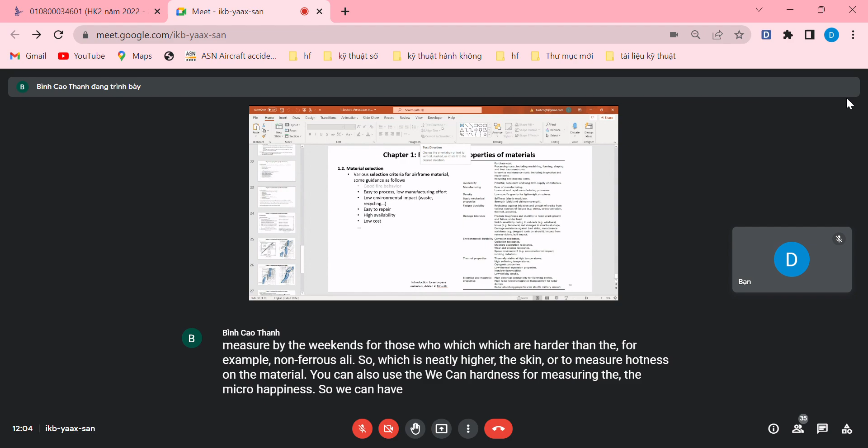Vickers hardness is quite great because it has a continuous scale, which can measure from soft material up to very hard materials. But it takes a little bit longer time to measure compared to Rockwell hardness, for example Rockwell C.

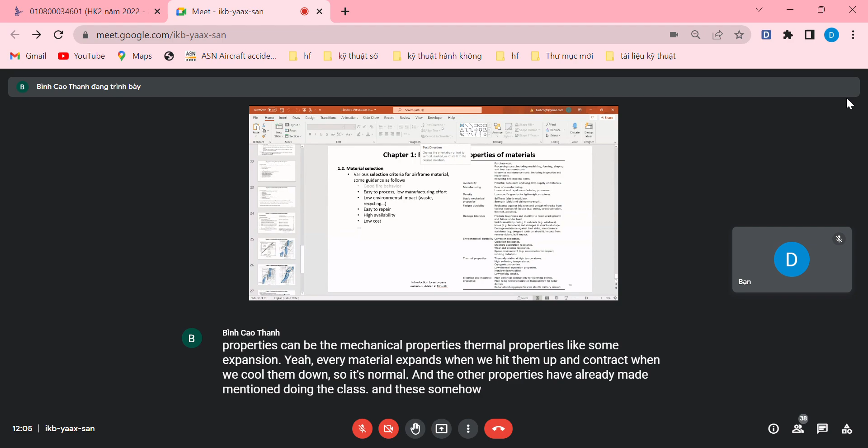We also deal with different kinds of properties - can be mechanical properties, thermal properties like thermal expansion. Every material expands when we heat it up, and contracts when we cool it down. So it's normal. The other properties have already been mentioned during the class, and are somehow related to the cost of strength of material - for example, the strength.

For example, the stiffness. You have the relationship between stress and strain, and we have the stress-strain curve for every material. Let's say the elongation, percentage elongation, in order to show whether the material behaves ductile, in a ductile regime, or in a brittle regime.

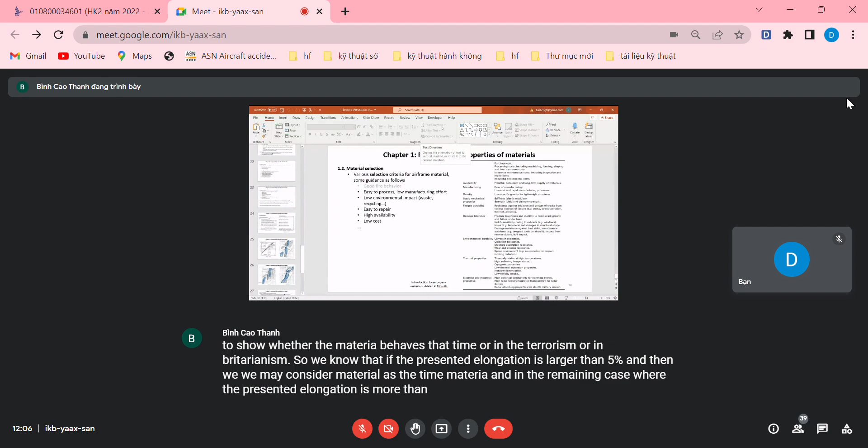We know that if the percentage elongation is larger than 5%, we may consider the material as a ductile material. In the remaining case, where the percentage elongation is smaller than 5%, you have brittle materials. For ductile material, generally speaking, you have damage tolerance, because if there is an impact force applied onto the component made of ductile material...

In that case, if the stress occurring inside the material is larger than the yield strength, you can have plastic deformations. Then the stress continues to increase up to the ultimate tensile strength, and afterward you may have fracture.

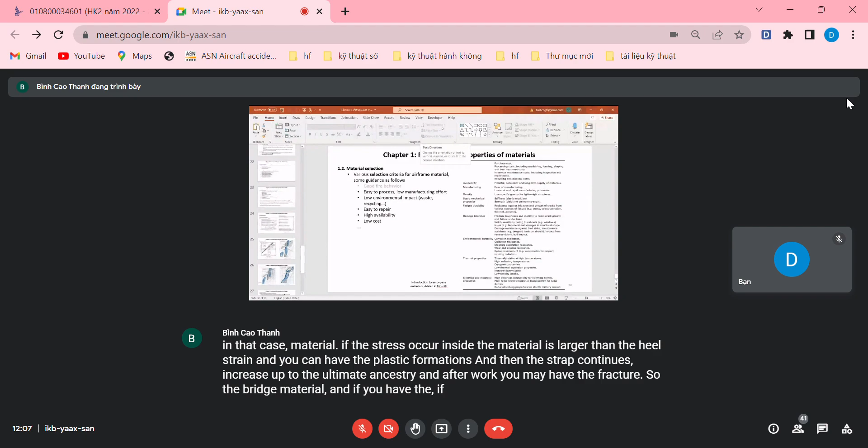But for the brittle material, if the external load applied onto the component is larger than the yield strength, you may observe sudden damage, and there's no damage tolerance. So this is unexpected for aerospace structures, where you need damage tolerance.

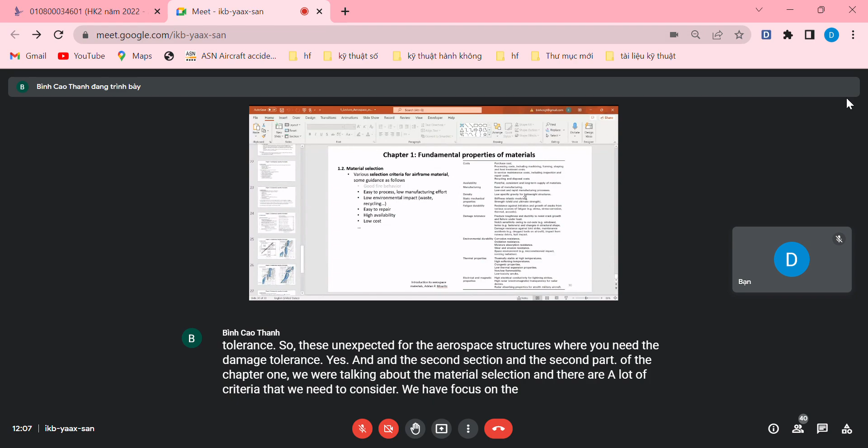In the second section, the second part of chapter 1, we were talking about material selection, and there are a lot of criteria that we need to consider. We have focused on the graph generated by Professor Michael Ashby, as I have talked to you about.

Here on this slide, you can see that there are several criteria that you can consider when you select the material for an aerospace application.

One of the most important things you should consider initially is cost, because if it's too expensive, it's meaningless to consider in the next step.

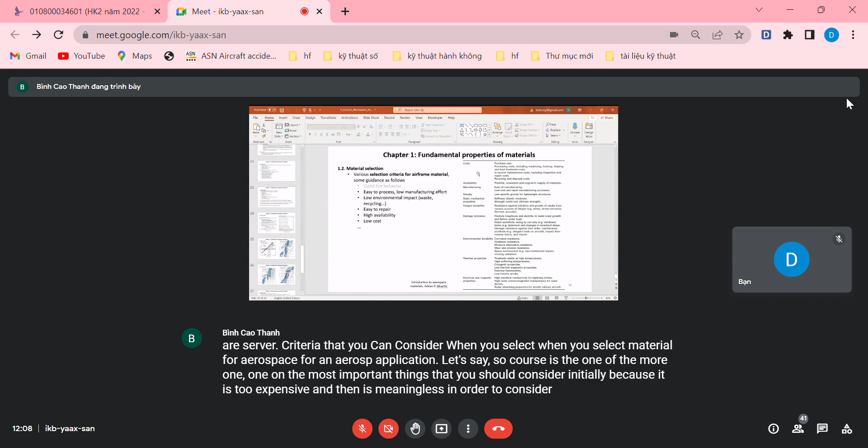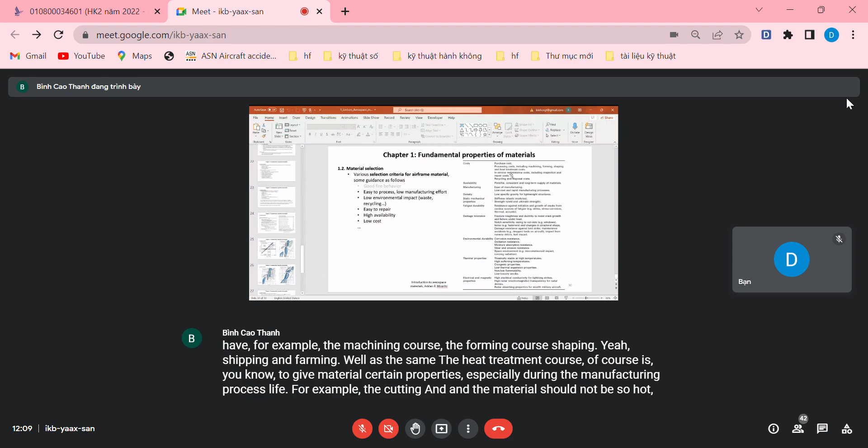This can contain the purchase cost, processing cost, regarding the manufacturing phase. The related costs can include machining cost, forming cost, shaping and forming. The heat treatment cost is to give the material certain properties during manufacturing, like cutting - the material should not be too hard, otherwise the cutting tool will wear fast, and you need to replace it with a new cutting tool or reshape the cutting edge of the tool before continuing the cutting process.

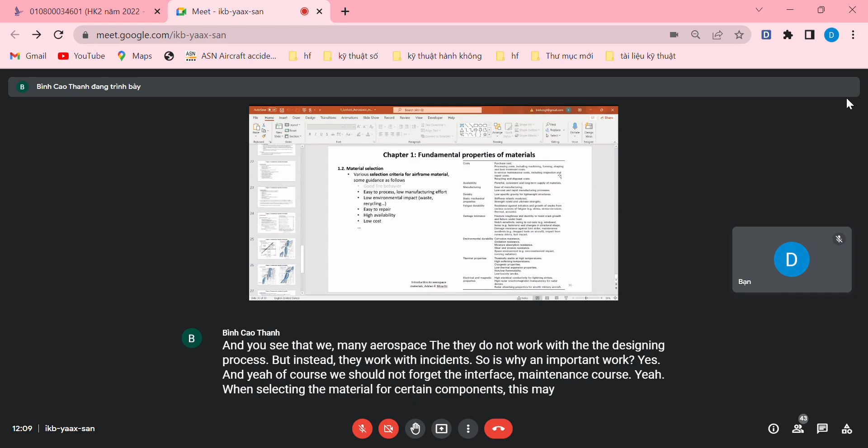In-service maintenance costs: you work with aerospace components, and many aerospace engineers do not work with the designing process, but instead work with in-service maintenance. It's quite an important work. We should not forget the in-service maintenance cost - when selecting material for certain components, this may include inspection cost and reparation cost. Also recycling and disposal costs, if needed.

Availability, yes, because if this is plentiful cost may be reduced, but if it is too hard to find a suitable material for making a certain component, the price rises significantly due to the material being unique and quite difficult to find.

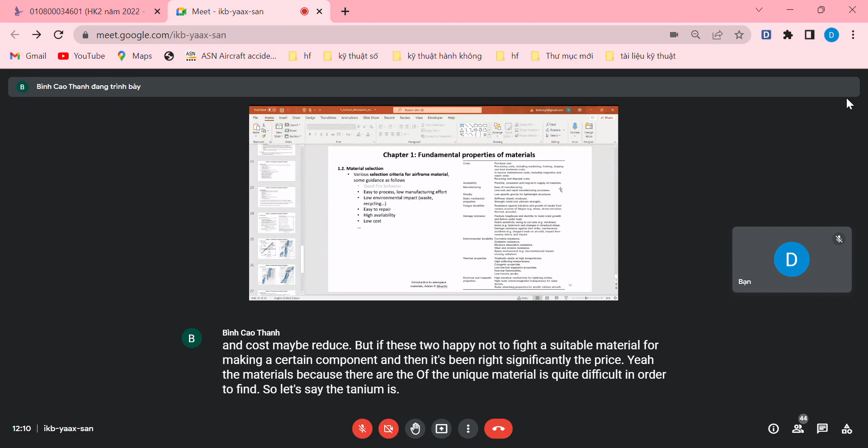So let's say titanium is one of the expensive materials. Nickel is also expensive. For example, for wire, we use copper alloy instead of gold - we know gold has the highest electrical conductivity, but due to the high cost, we don't use it for general electrical components in airplanes. But for other applications in the computer field, it's possible to use.

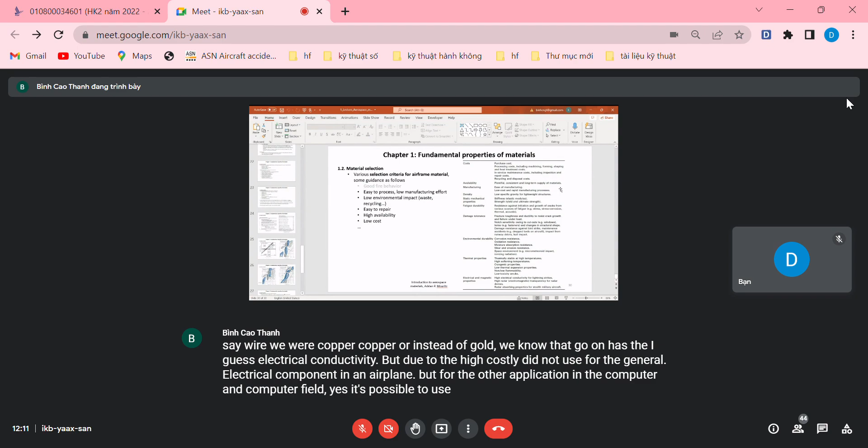Manufacturing - it should be easy for manufacturing. Otherwise it will take a long time to fabricate the parts, and then we have to apply heat treatment, for example, to promote the ease of manufacturing for the materials, in order to reduce the cost of the manufacturing process. That's why we need to reduce the cost - we need to make the manufacturing process faster, or rapid manufacturing process.

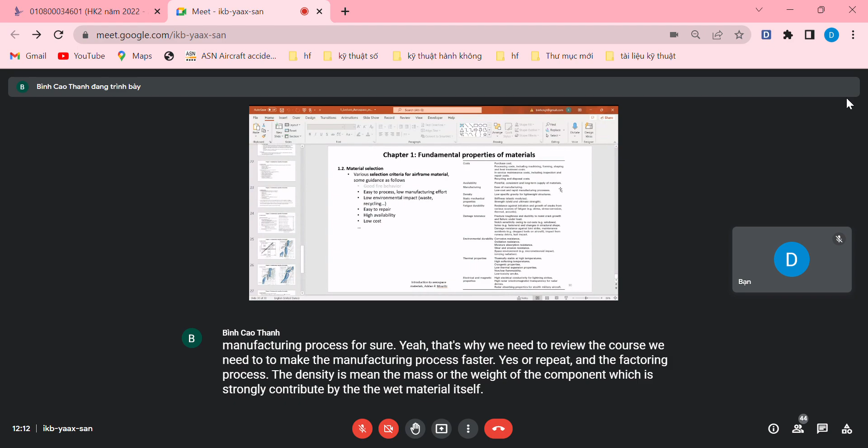Density means the mass or weight of the component, which is strongly contributed by the weight of the material itself. Even if you optimize the shape of the structure, if you use a heavy material, the part will be heavy as a result. For the same components, if you use steel, it will be more or less 3 times heavier than if you use a part made of aluminum alloy. This is one of the criteria you need to consider when selecting the suitable material.

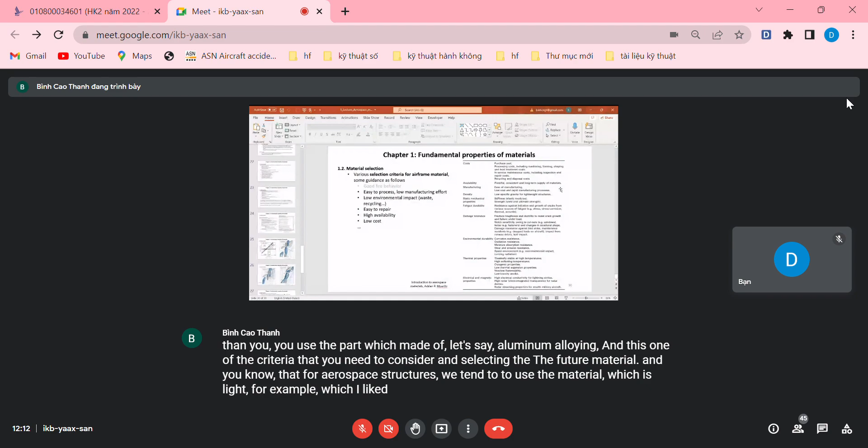For aerospace structures, we tend to use light materials, for example aluminum alloy, titanium alloy, or nickel-based super alloy instead of steel. But anyway, steel is the traditional material for heavy loaded structures. So in aerospace, people still use steel - for example, the landing gear can employ steel as the use material.

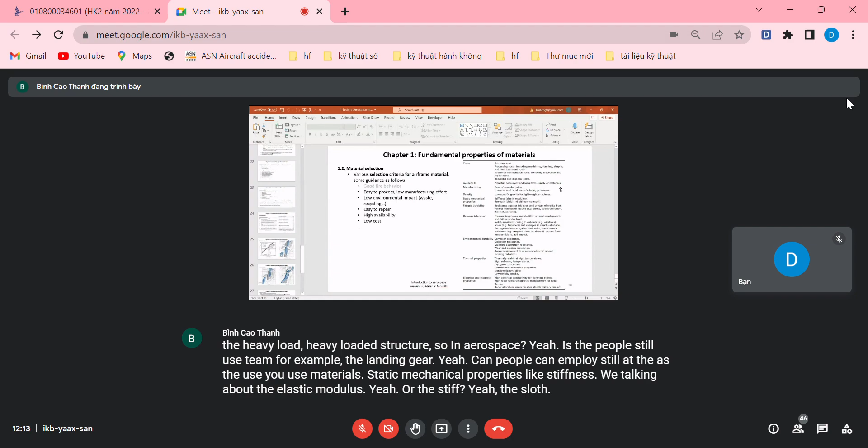Static mechanical properties like stiffness - we're talking about the elastic modulus, or the slope of the stress-strain curve within the elastic region, which means the stiffness. Or the strength - we are talking about the yield strength or the ultimate tensile strength. But normally we refer to the yield strength because we want the component to work within the elastic regime rather than the plastic regime, because when plastic deformation occurs, this is permanent deformation, without elastic recovery.

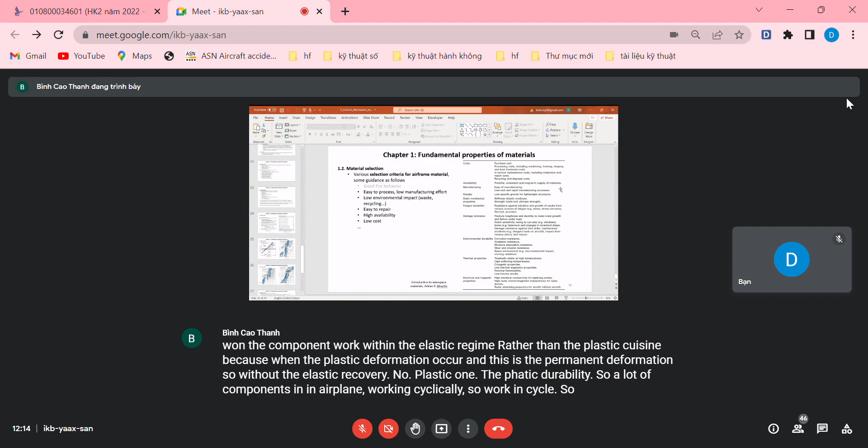The fatigue durability - a lot of components in an airplane work cyclically. Like the gear rotates clockwise for a number of cycles, and then counterclockwise for other number of cycles, and the material can be damaged in terms of fatigue. In such case, this needs to have fatigue resistance, to avoid the initiation and growth of cracks that cause fatigue damage.

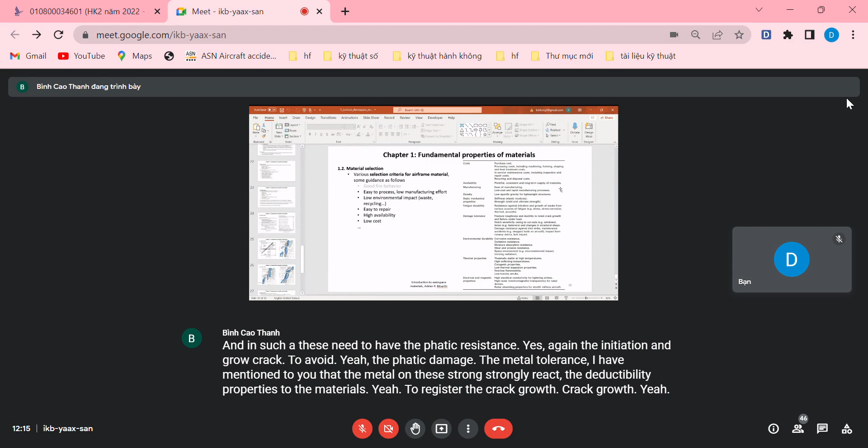Damage tolerance. I have mentioned to you that damage tolerance strongly regards the ductility properties of the materials, to resist crack growth and failure under cyclic load. So it is better to create the part with high surface quality, so that we avoid the formation of cracks on the surface.

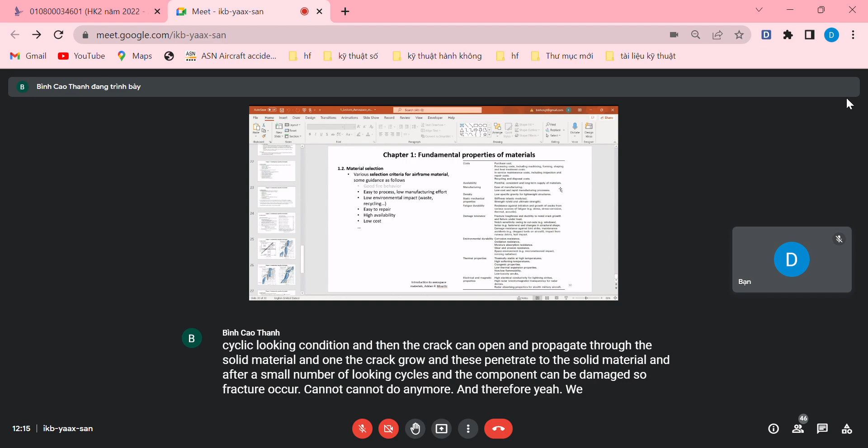Because if there is a crack or micro crack on the surface during the cyclic working condition, the crack can open and propagate through the solid material, and when the crack grows and penetrates the solid material, after a small number of working cycles the component can be damaged, so fracture occurs. It cannot work anymore, and therefore we avoid any formation of notches, holes, any change in the structural shape.

So you should maintain continuity in cross sections, without the formation of areas that raise the stress, or stress concentration areas. So we should avoid these areas.

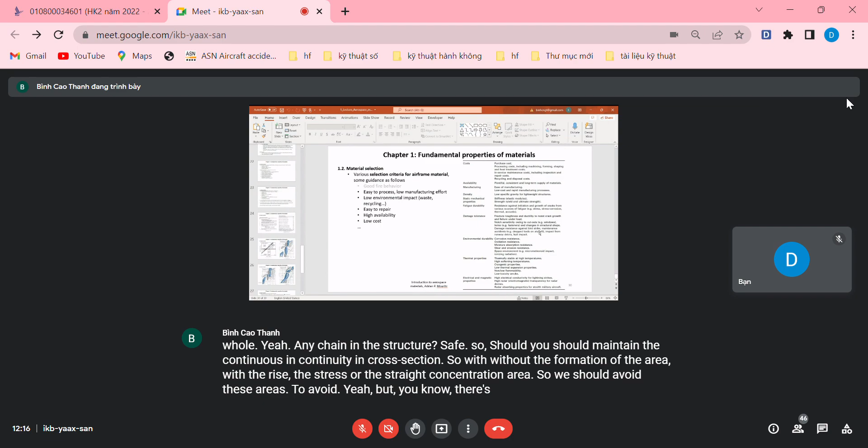Oh come on. And yes, I'm sorry for a minute because a student contacted me and asked for information about the class in room G113, because he attended the class on the third day and does not know how we plan to organize the course. Sorry, I'll just mute for a minute.

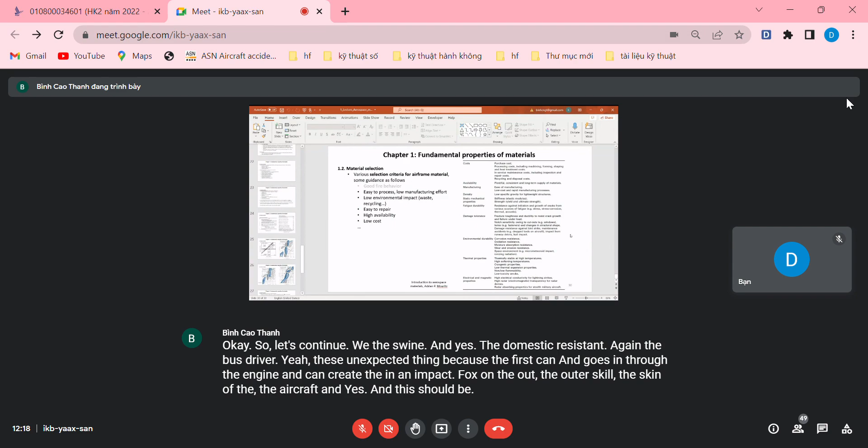And therefore the material should behave in a ductile manner, so that if there is an impact force created by, for example, the bird, then there's no problem with the airplane during the flight.

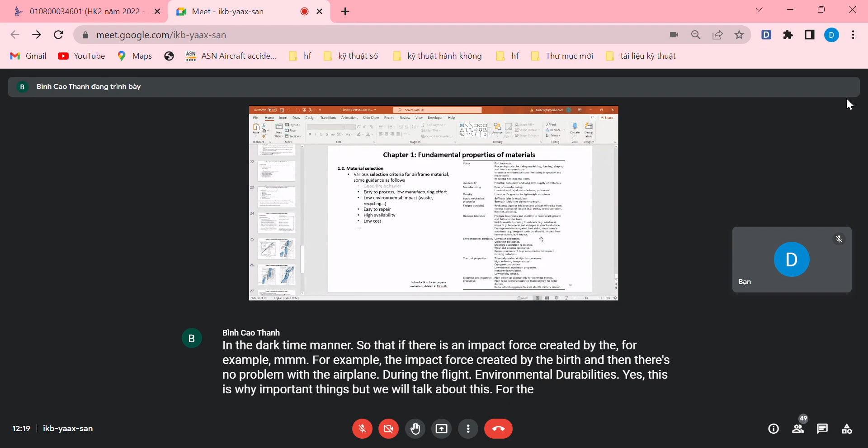Environmental durability, yes, this is important, but we will talk about this in the sixth chapter, the last chapter of the course. We'll be talking about corrosion resistance, oxidation probably a little bit, the corrosion risk resulting from the moisture or humidity of the environment. And wear, no, we are not going to talk about wear, except some information in the fourth chapter.

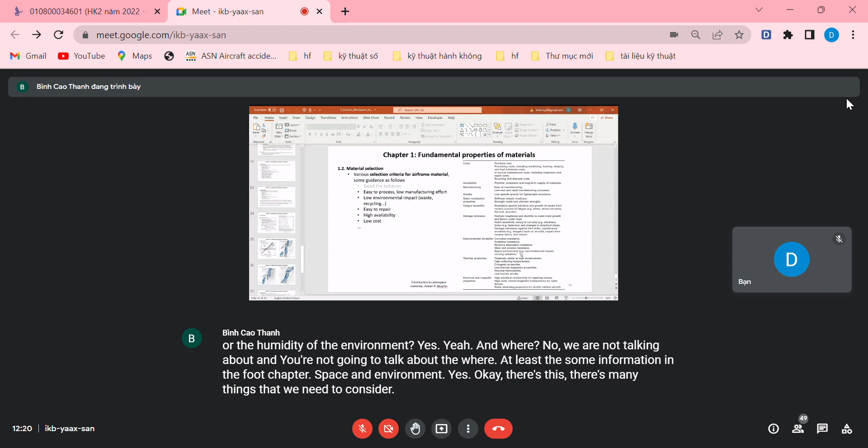Space environment. Okay, there are many things that we need to consider, but here are just some fundamental issues you should consider when selecting the material. So we only mention corrosion resistance when we take into account the environmental durability of the materials.

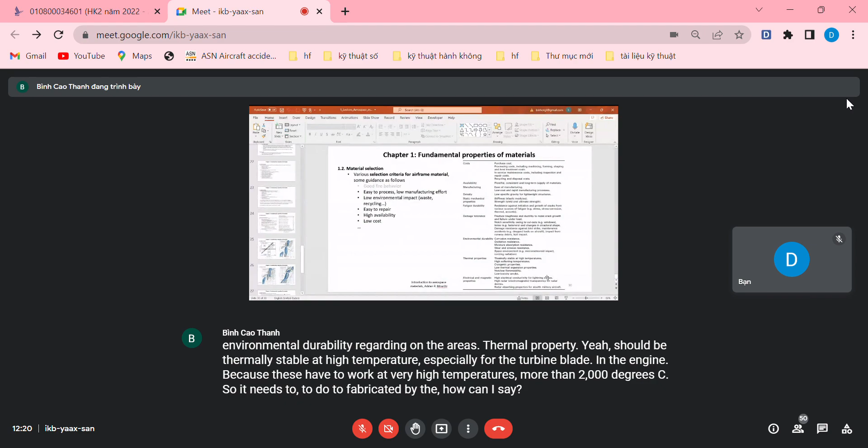Thermal properties: the material should be thermally stable at high temperature, especially for the turbine blade in the engine, because it has to work at very high temperatures, more than 2000 degrees C. So it needs to be fabricated from nickel-based superalloys. But since nickel-based superalloys can work at around 800 degrees C, you need some kind of coating, for example a ceramic coating called thermal barrier coating, in order to increase the thermal resistance of the material.

And you need to pay attention to the fact that at high temperature the material receives energy, and therefore the free Gibbs energy is high. The system is unstable, so it leads to the softening process. So the strength will be reduced.

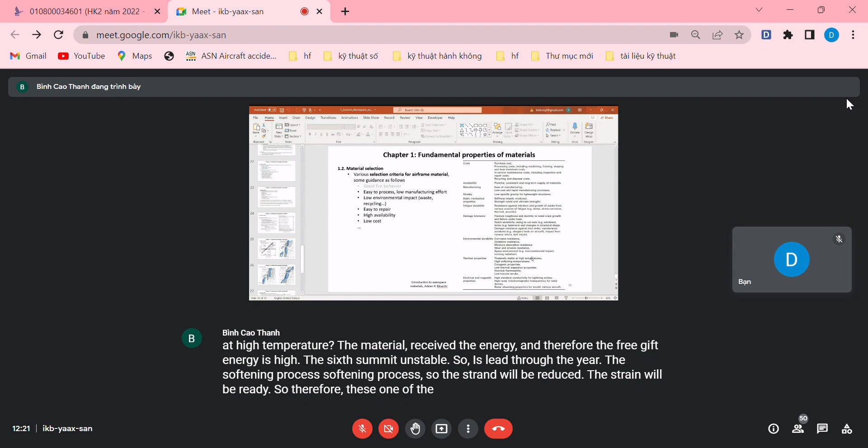So this is one of the things you need to consider when you select the materials, because at high temperature the strength is low compared to room temperature, and therefore even when the part works at high temperatures, the strength must be enough to withstand the load. That is an important point.

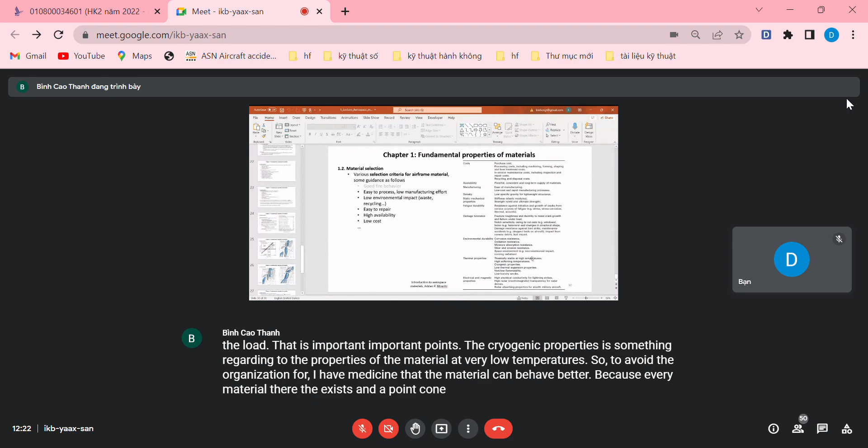Cryogenic properties regard the properties of the material at very low temperatures. I have mentioned that the material can behave brittle, because for every material there exists a point called the ductile to brittle transition temperature. At that point, the behavior of the material changes from ductile to brittle.

And at low temperatures the material behaves in a brittle manner, so it's quite dangerous, especially if the part withstands, let's say, an impact force. So it's easy to be fractured, and so on.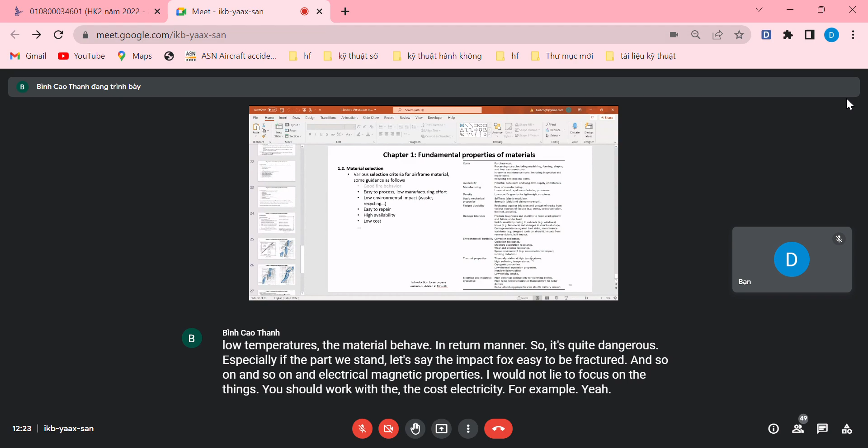Electrical and magnetic properties, I would not like to focus on these things, because you would work with electricity, for example. But generally speaking, it needs to have high electrical conductivity for lightning strikes, lightning in the sky.

We will also deal with radar transparency. Just some information: when we talk about polymeric material or composite material, there are certain materials that can help to absorb the radar wave without reflecting it, and then the radar cannot receive the information from the object that needs to be detected. We call this radar transparency. So there's no possibility to detect the part by the radar wave.

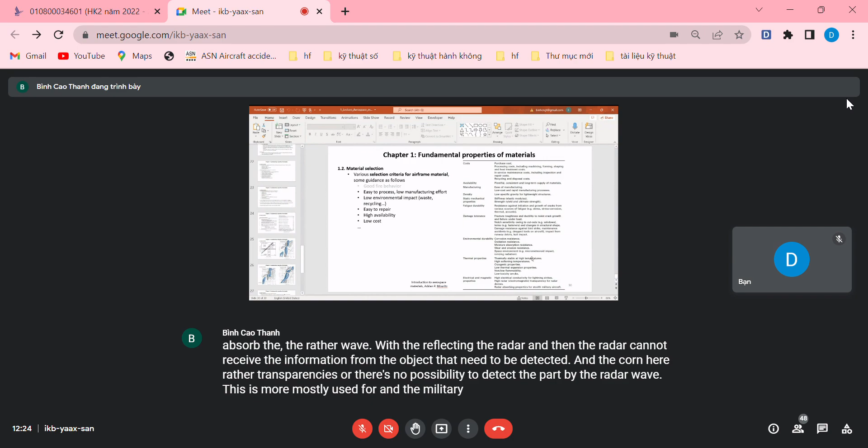This is mostly used for the military sector. Yes, like some kind of fighter airplane. So it needs this kind of property, but not the commercial airplane.

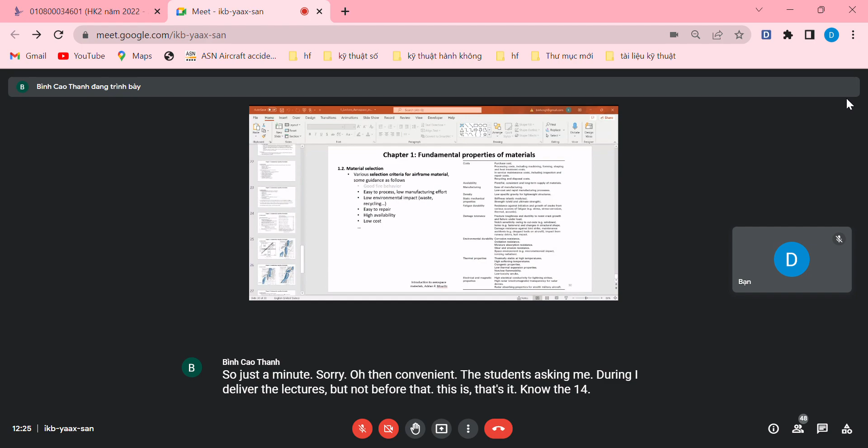Sorry, for a minute. Yeah. So just a minute. Sorry for the inconvenience. Students asking me during I deliver the lectures, but not before that. This is... where is it? So on the 14th. Okay, sorry for that.

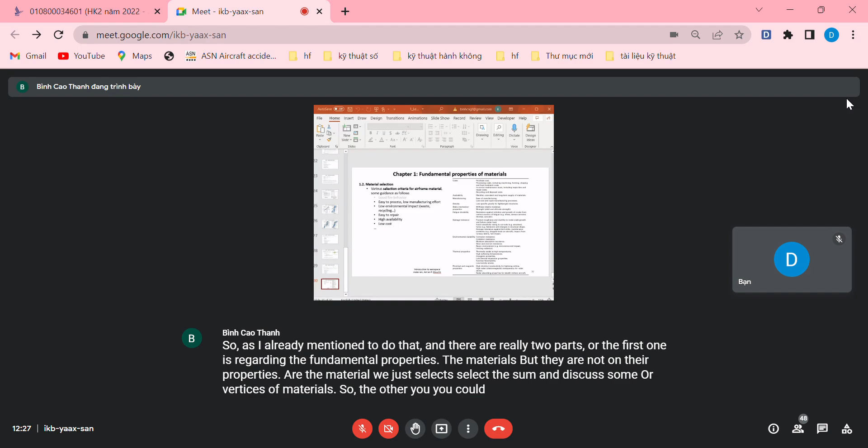So this is the main information regarding chapter one. Do you have any questions regarding the first chapter? As I already mentioned to you, there are mainly two parts. The first one is regarding the fundamental properties of materials, but they are not all the properties of the material. We just selected and discussed some properties of materials. For the others, you could read from the textbook. And the second part of chapter one is material selection. I have summarized it on the last slide and already reminded you a few minutes ago.

Okay, and now we can continue with the second chapter. For the second chapter, we study ferrous alloys. Ferrous alloys are many types of alloys with the main elements being, I'm sorry, iron and carbon. And with the combination of iron and carbon, we have different kinds of steels. It actually depends on the composition.

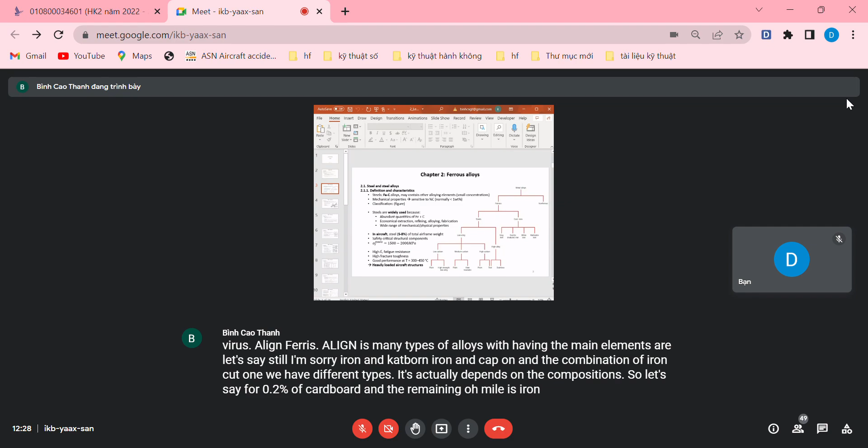So let's say for 0.2% of carbon and the remaining amount is iron, then you have one type of steel. By changing the amount of carbon inside the steel, you have different kinds of steels. But this is carbon steel. Once you add more types of elements to the iron and carbon system, you have alloy steel. And depending on the type and the amount of alloying elements, you would also have different kinds of alloy steels.

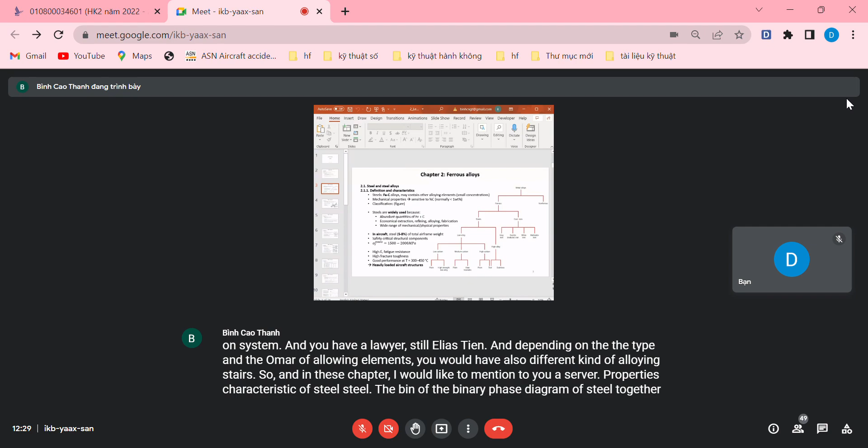In this chapter I would like to mention to you several properties and characteristics of steel alloys, the binary phase diagram of steel, together with the methods to heat treat the steel. This means that you apply heat treatment in order to modify properties of steel. For example, annealing is applying heat in order to bring the steel back to a more stable condition. Or you can use quenching, which you may be familiar with in Vietnamese as tôi thép, and another type of heat treatment called tempering.

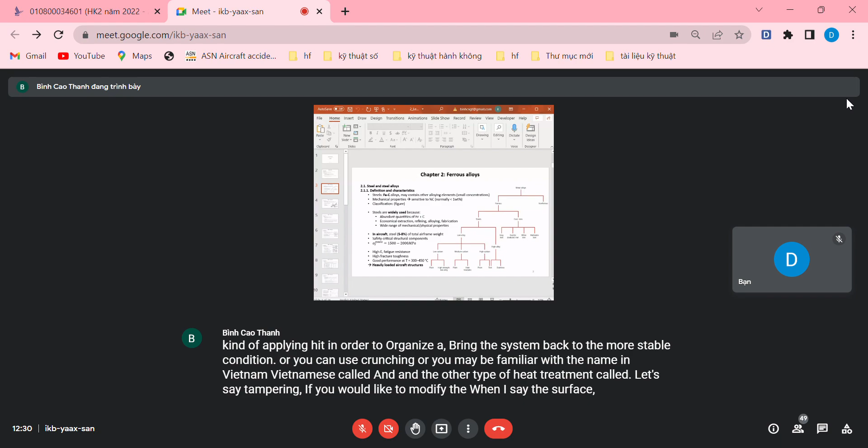If you would like to modify the surface properties of the steel part, then you can apply carburizing or nitriding in order to increase the hardness of the steel and so on. So basically, we are going to study characteristics of steel, properties of steel, the binary phase diagram of steel, carbon steel, the methods to heat treat steel, and the designation.

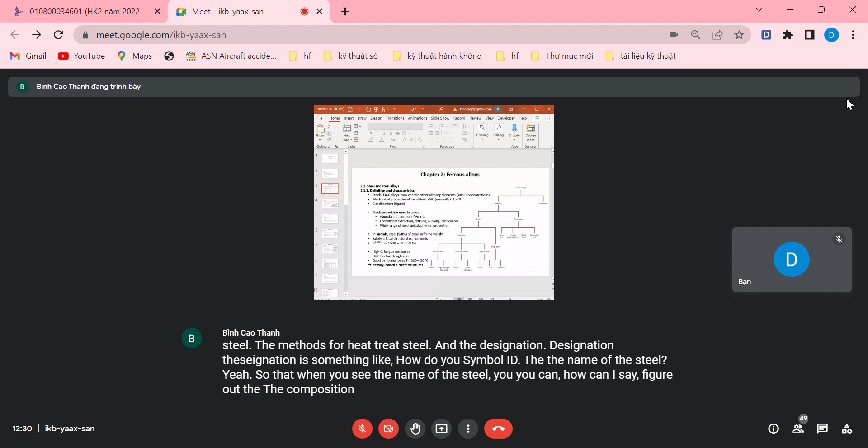Designation is how you symbolize the name of the steel, so that when you see the name of the steel, you can figure out the composition of the steel, the alloying elements used for this kind of steel, and the heat treatment applied in order to improve or modify the mechanical properties of that steel. So this is what you need to deal with in the second chapter.

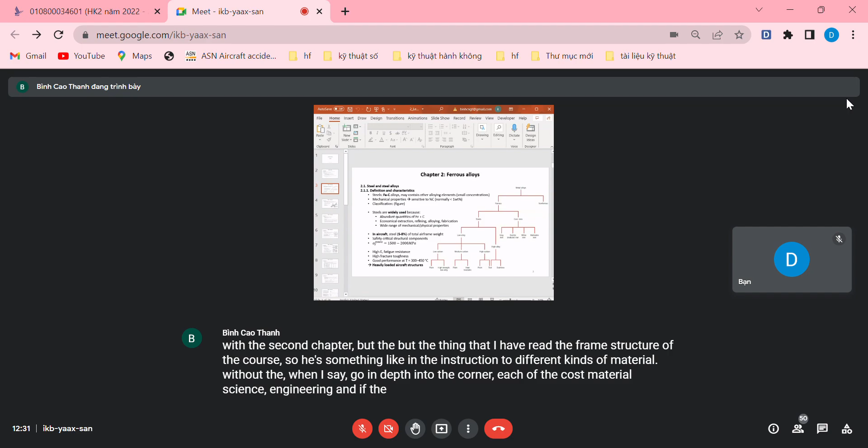But the thing is that I have read the frame structure of the course. It's something like an introduction to different kinds of materials without going in depth into the core knowledge of material science and engineering. And if the thing is like that, then it's quite difficult for you to understand what has been mentioned during the course.

And therefore I would like to introduce some additional information. Although this information is not listed in the course description or in the frame structure of the course, it is quite important and necessary for you in order to understand the following part that will be introduced to you next day or in the next month. That is quite important.

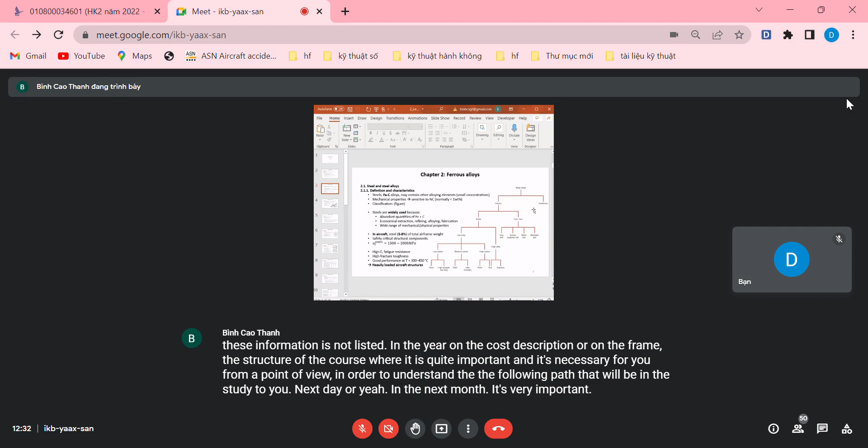And this morning I downloaded lectures from the Marine University in Vietnam, Đại học Hàng hải, Viện Cơ khí. Since I can download this document, I'm sure that you can also download this document as an additional reference in order to study the course. And this is in Vietnamese, so it's quite easy for you to read. Yeah, for sure.

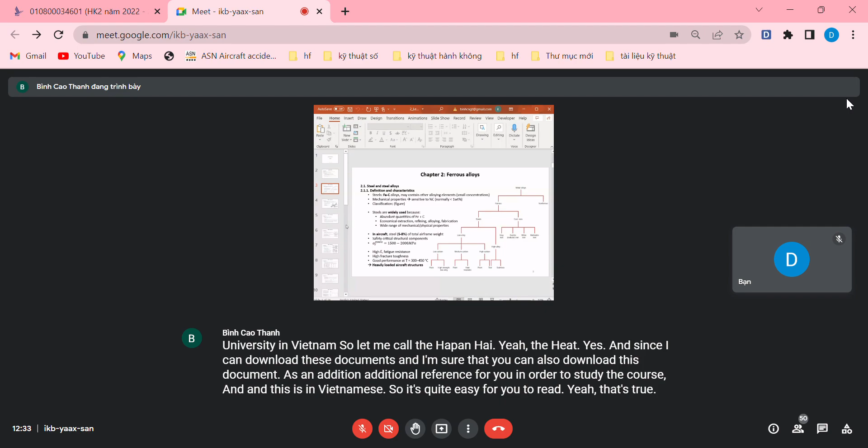And I will introduce to you briefly the beginning part of the second chapter, and then I will give you some fundamental knowledge about the course, which lays the foundation for you in order to understand the upcoming terms. Otherwise it will be really difficult to understand. Okay, in Vietnamese.

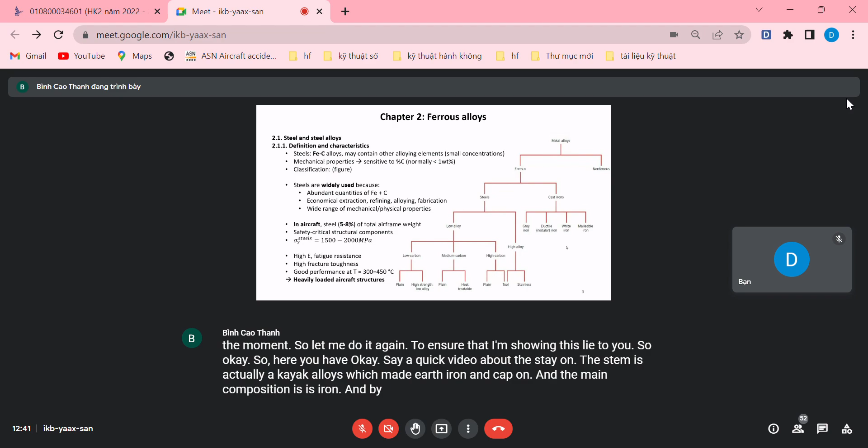So here you have, how can I say, a quick view about the steel. The steel is actually a kind of alloy which is made of iron and carbon, and the main composition is iron. And by adding a small amount of carbon, you have a different kind of steel. But please remember that the amount of carbon should be limited, because the higher amount of carbon introduced into the steel, the more brittle the material is. And therefore, in general, we will use the steel with the amount of carbon smaller than 1%. So it means that more than 99% of steel is iron or made of iron.

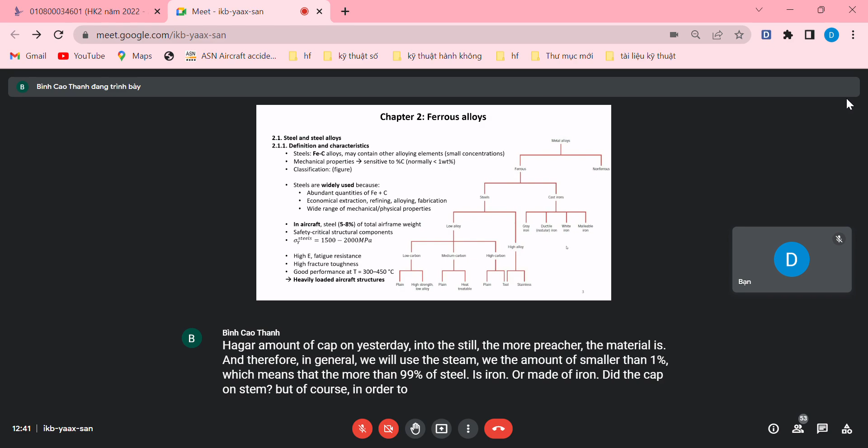The carbon steel. But of course, in order to increase properties of the carbon steel, people can add more elements we call alloying elements in order to increase mechanical and other properties of steel. And in this case, we have alloying steel or alloy steel, but with small concentration. But of course, you still have some cases of steel having more than 10% of alloying elements, for example, the stainless steel, with the amount of chromium larger than 10%. So, like the alpha stainless steel, for example, you still have a quite high amount of alloying elements. But I will talk to you about this steel later.

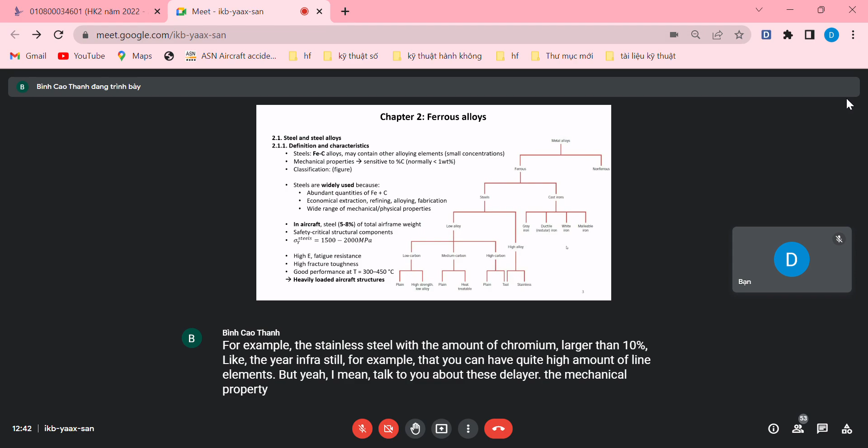The mechanical property of steel. So basically, it's very sensitive to the carbon concentration, and increasing the amount of carbon increases the brittleness of the material, and that's why people usually use the steel having the amount of carbon smaller than 1%. Here is the 1 weight%. Yes, so the percentage measured by weight. Yeah, 1 weight%.

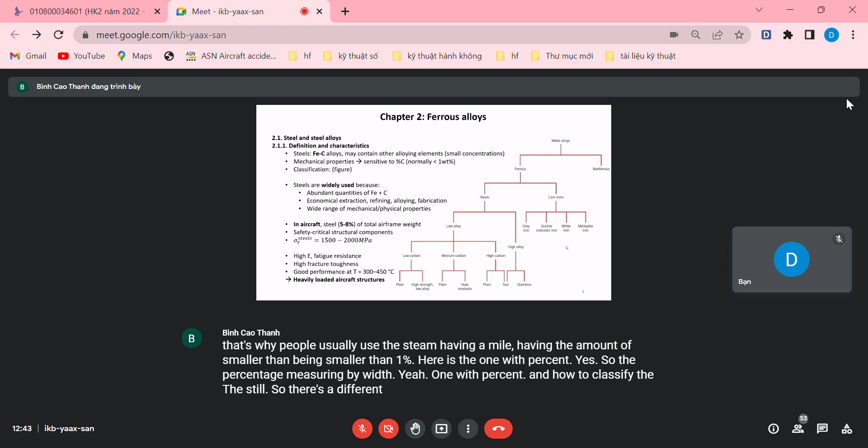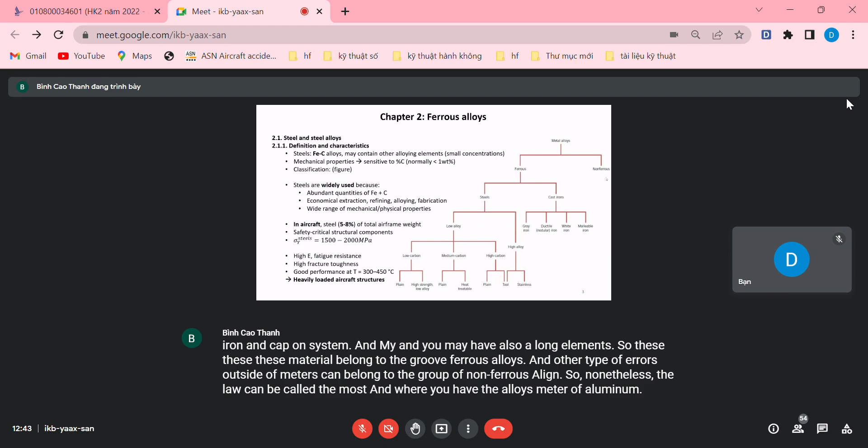And how to classify the steel. So there's different types of steel. According to this figure, you see that the material alloys can be divided into two groups: ferrous alloys, so anything regarding the iron and carbon system, and you may have also alloying elements. So these materials belong to the group of ferrous alloys. And other types of metals can belong to the group of non-ferrous alloys. So non-ferrous alloy can be called hợp kim màu, where you have the alloys made of aluminum, copper, titanium. You can have super alloys and other types of metal-based systems. And for the ferrous alloy, you have two subcategories: steels and cast irons. So steel means thép, and cast iron means gang.

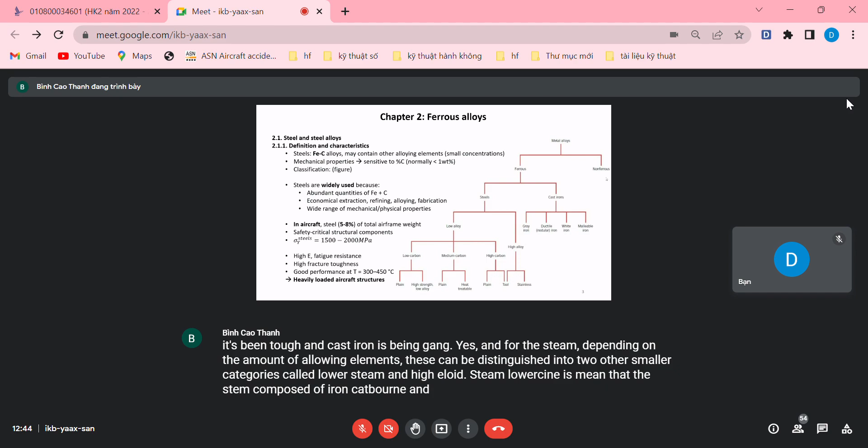And for the steel, depending on the amount of alloying elements, it can be distinguished into two other smaller categories called low alloy steel and high alloy steel. Low alloy steel means that the steel is composed of iron, carbon, and a low amount of alloying elements. And high alloy, of course, you should have the higher amount of alloying elements. And I have mentioned to you that for the stainless steel, you may add more than 10% of chromium or nickel, and you have this kind of steel. So stainless steel belongs to the group of high alloy steels.

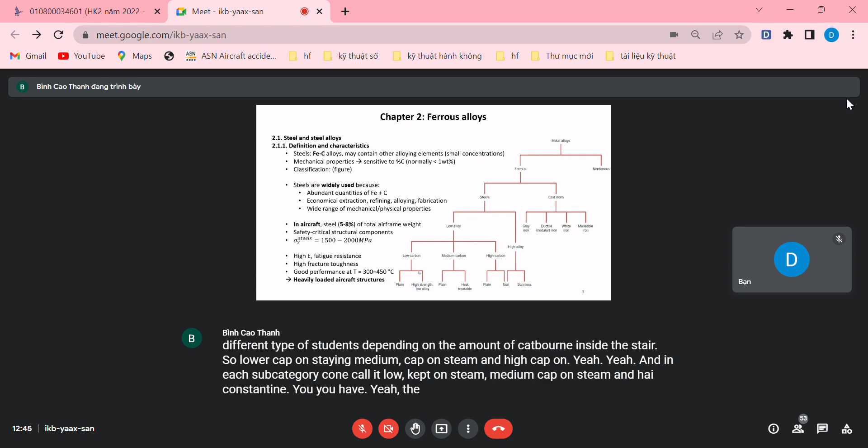For the low alloy steel, this can be divided into three different types of steels, depending on the amount of carbon inside the steel. So low carbon steel, medium carbon steel, and high carbon steel. And in each subcategory, low carbon steel, medium carbon steel, and high carbon steel, you have the other two, let's say, classes called plain or high strength. For the medium carbon steel, plain and heat treatable. Heat treatable means that you can apply thermal treatment in order to modify properties of the steel.

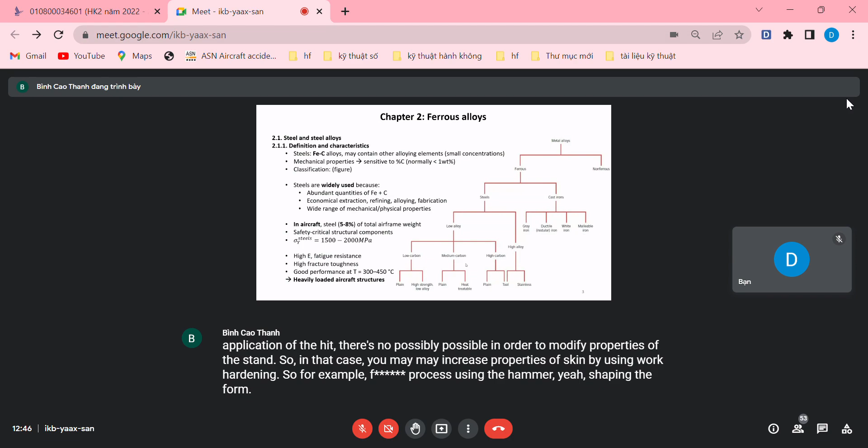And non-heat treatable means that with the application of the heat, it's not possible to modify properties of the steel. So in that case, you may increase properties of steel by using work hardening. So for example, the forging process, using the hammer, shaping the form of the part, and during this process you increase the strength of the material. And high carbon steel and high alloy steel can also be the group for the tool steel, or the cutting tool steel.

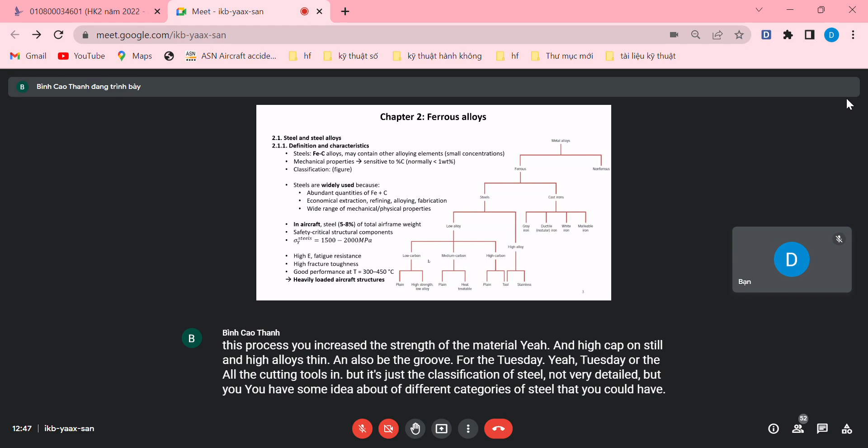But it's just the classification of steel, not very detailed, but you have some idea about different categories of steel that you could have. Generally speaking, low carbon steel or carbon steel can be used for...

Building construction. So it's used for civil engineering field, but not for the mechanical engineering field.

And for high alloy steel, you can use it with limited application in the aerospace industry. For example, the landing gear.

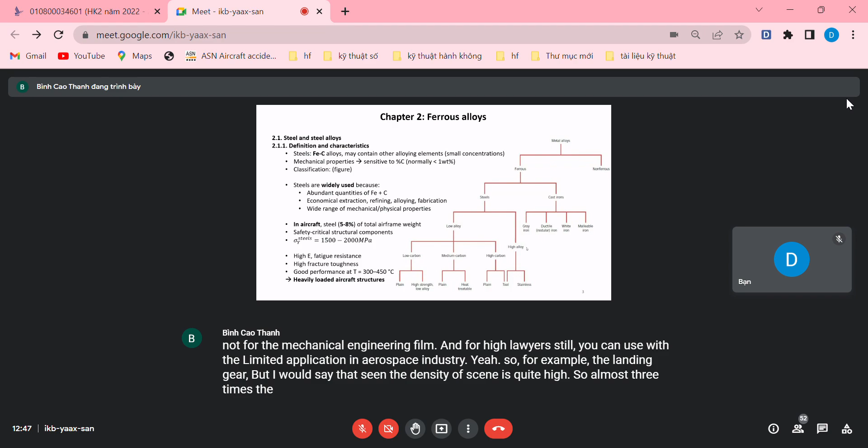But I would say that since the density of steel is quite high, almost 3 times the density of aluminum alloy, we use steel with caution because it increases significantly the weight of the airplane, and therefore it reduces the efficiency of...

Using fuel. Yeah, for sure, because we tend to make lightweight structures. But if we employ steel as the material, we significantly increase the weight of the airplane, and this is an unexpected thing because we want to reduce the weight.

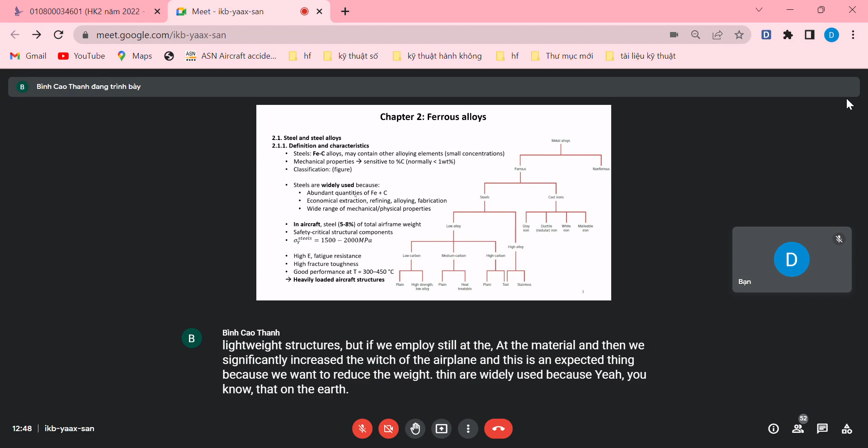Steel is widely used because on earth there are abundant quantities of iron and carbon, and therefore steel is widely used for constructing buildings, for example.

Inside the concrete, usually you have the frame which is made of steel, because concrete withstands compressive load very well, but steel on the other hand can withstand tensile load. Therefore with concrete it's necessary to use steel inside.

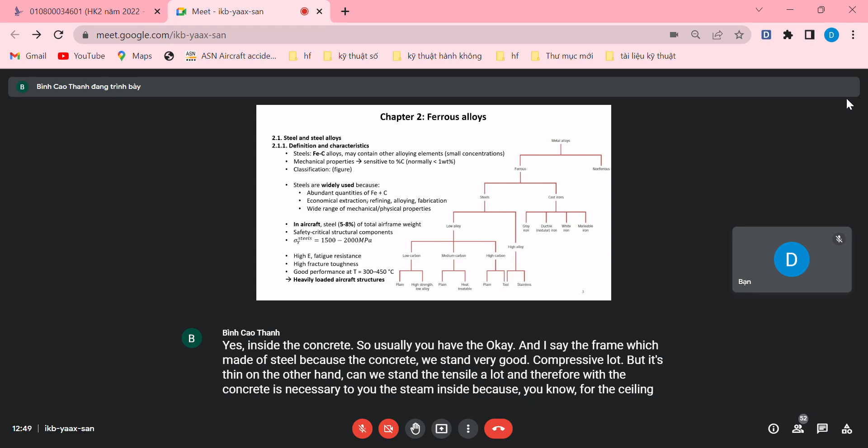For making the ceiling, usually you use concrete, but in the concrete ceiling, normally people tend to put the steel frame more or less at the bottom of the concrete, for example the concrete beam, because when the concrete is under load, it tends to bend like this.

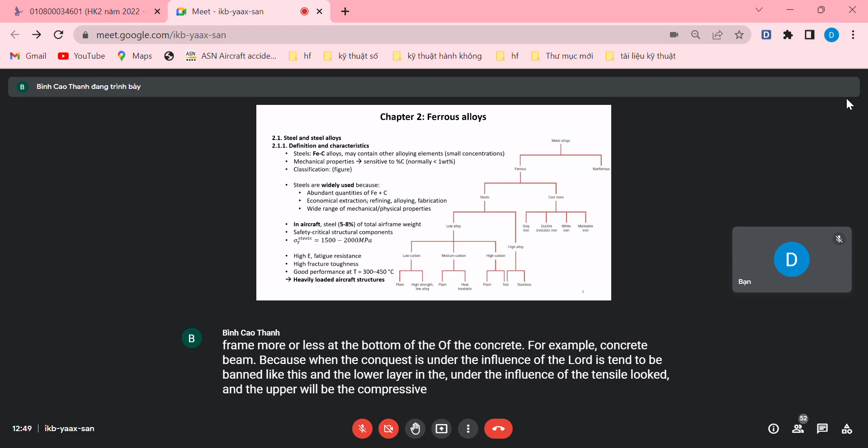The lower layer will be under tensile load, and the upper will be under compressive load. Since steel belongs to the lower layer, it can help the concrete withstand the tensile load.

Above, there's no steel, just concrete, and the ceiling or beam can withstand the compressive load very well. This is due to the high compressive load-withstanding ability of concrete.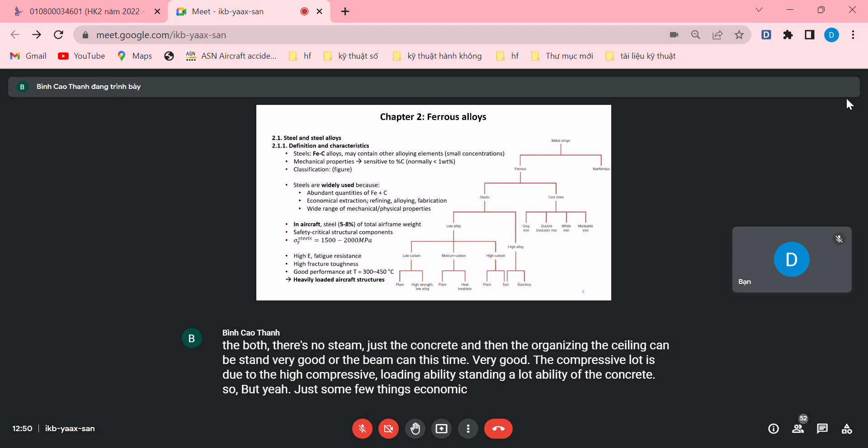Just a few more things: economic extraction, because the extracting process has been developed for 100 years for steel. It's been developed for quite a long time, and the price is now significantly reduced.

We have economic extraction, refining, alloying with different kinds of alloying elements to fabricate alloy steel, and the fabrication process as well. Since we have many methods, we have many types of alloy steel, and as a result you have a wide range of mechanical and physical properties for steel.

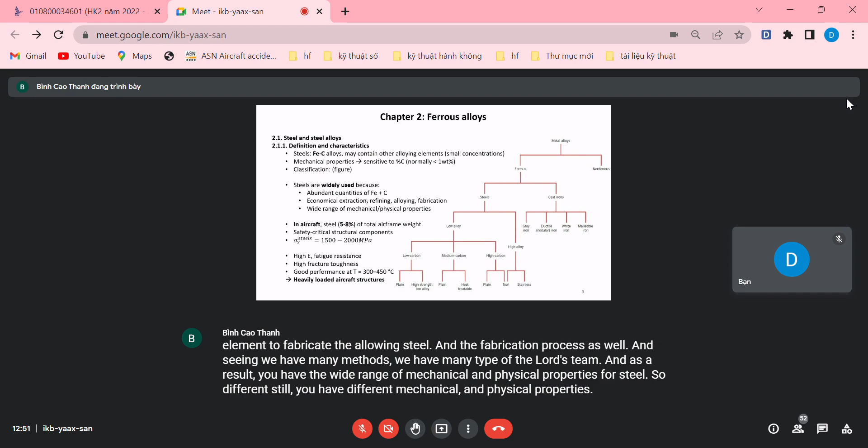Different steels have different mechanical and physical properties. Just by changing the composition of the steel, the number of elements, and the amount of each element, you get different kinds of steel.

In aircraft, people just use steel for making about 5 to 8% of components, and it's used mostly for making the airframe. Why? Because it's heavy.

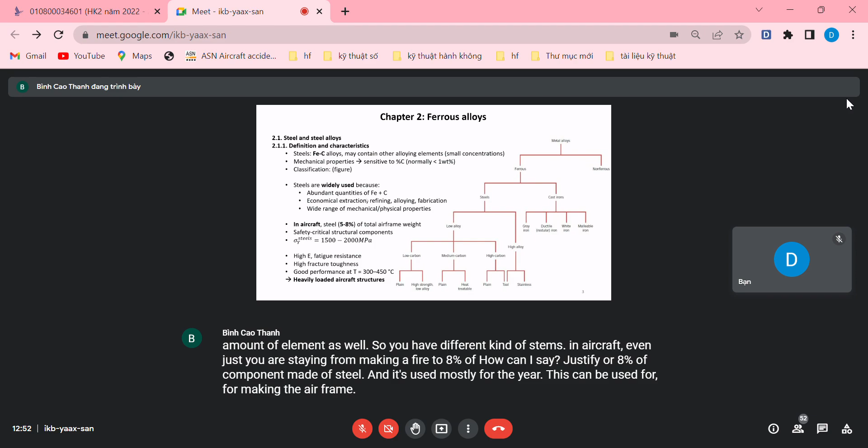In order to save weight of the airframe, it's necessary to limit the use of steel for aircraft structures, just for making safety-critical structural components, which require relatively high strength, ranging from 1.5 up to 2 gigapascals.

In such a case, you will use steel for fabricating the aerospace component, let's say.

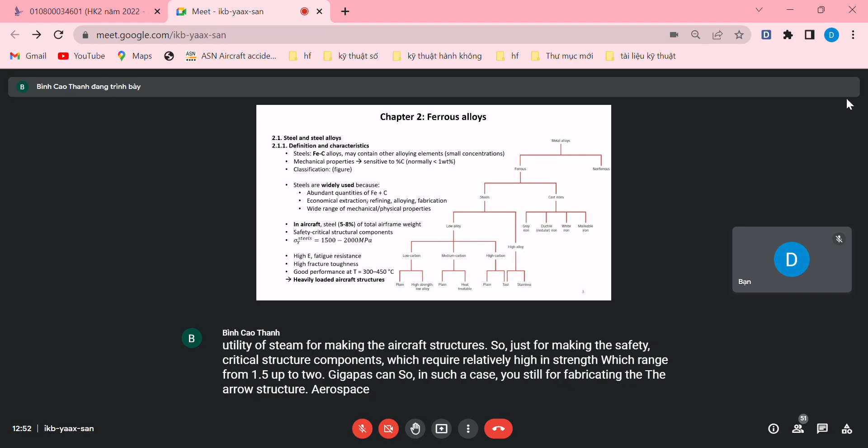In general, steel has quite high elastic modulus, high fatigue resistance, and high fracture toughness under normal conditions. This means it can keep structural integrity, without formation of fracture, during the working life of the part made of steel.

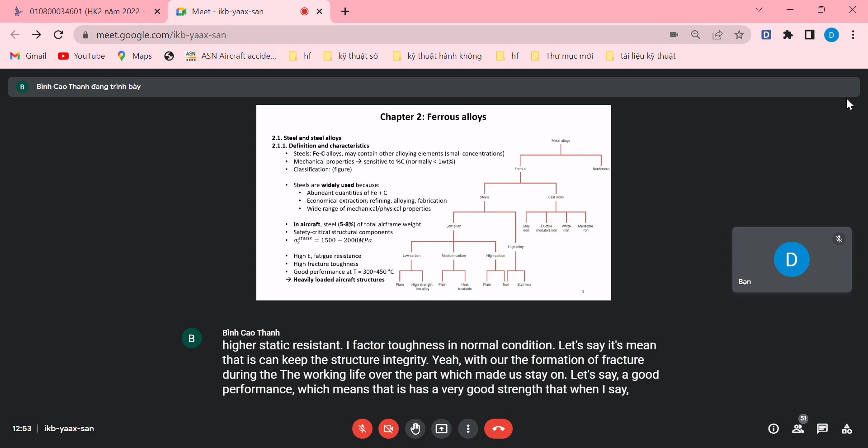Good performance means it has very good strength within the temperature range from 300 up to 450 degrees C. Be careful if the temperature is reduced, because it transitions to a brittle regime. In that case, you must be careful because if the steel behaves in a brittle manner when the temperature is reduced, the damage tolerance is reduced as well.

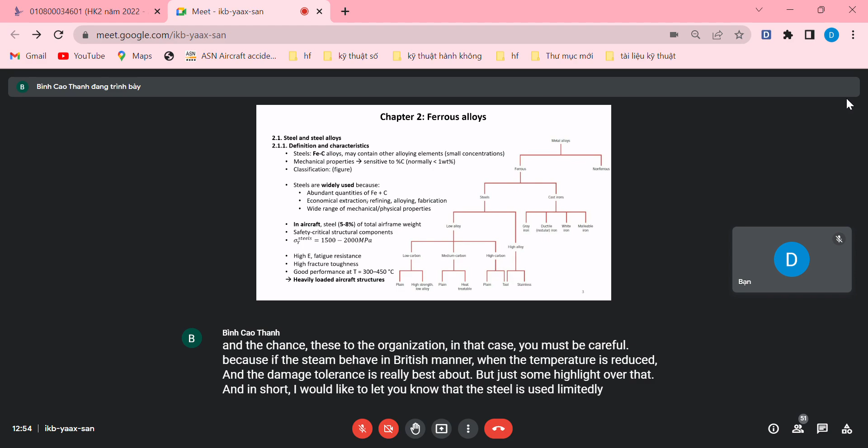But just some highlights about that. In short, I'd like to let you know that steel is used in a limited way in aircraft, and is mostly used for making heavily loaded aircraft structures.